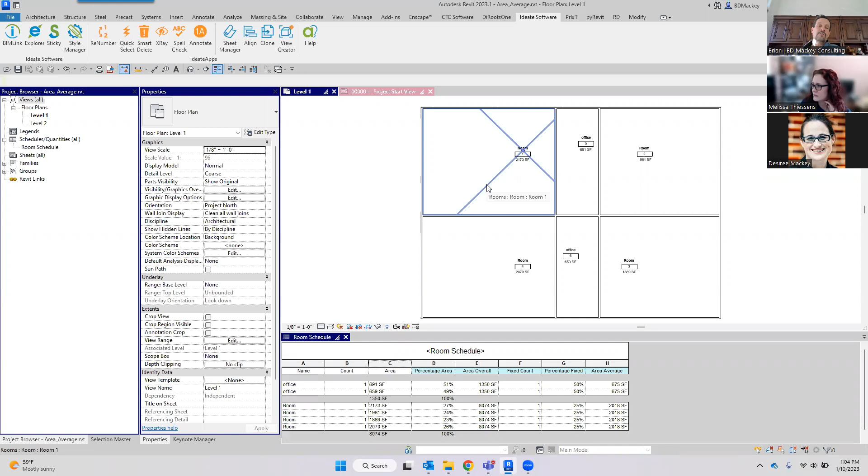And this comes back to that post from over a decade ago: you can't use the overall totals in these things. So looking at this, I've got 4 rooms called room, and 2 of them called office, right? So I've broken those down in my schedule. I am sorting and grouping it simply by the name, and then I've got some totals to calculate the totals of each of those.

When we're doing our occupant load calculations or plumbing calculations or anything in Revit where we want to use the overall math to figure out a calculation, we can't do that in Revit natively. So to get this to work, we need to figure out what percentage of the overall grouping this one square footage is. Once we know that percentage, we can then multiply times that percentage to get the overall square footage.

And it does look a little bit weird when you start looking at it: oh, gee, I see 1350. That's the sum down here, right? You see that on every single one of these. But if I go to sorting and grouping and uncheck itemize every instance, now you're going to see, oh, here's the whole overall 1350.

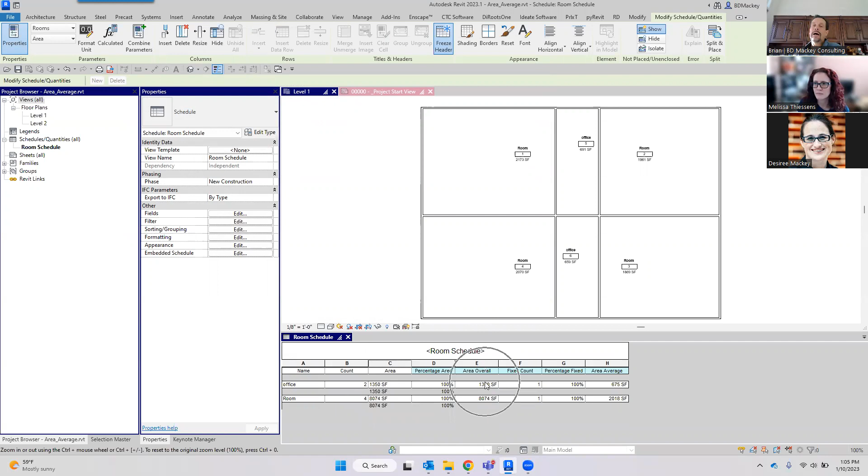Now I see that 1350 here. So in the overall area, I'm summing the totals. This one, I am not. So the question might be, how does that happen? Well, the biggest thing you need to do in Revit is create some calculated values.

So all of these last 5 columns you see here that I highlighted in blue, these are all calculated values in the schedule, right? So the schedule is only pulling out the fields, name, and area. I pulled out count as an example, how we can't use it for the next step, but the only thing I'm truly using is name and area, right? So we then have to come in here and figure out what percentage of this when we go in there.

So when you go create a shared or a calculated value, give it a name, and then if you've ever noticed, you can choose between formula or percentage. Now, once you choose percentage, the first thing is going to be any of the other calculated values you have or parameters that you have inside of here. So the first 'of' is going to be, hey, choose from one of those parameters. And in this case, I want to know the area.

The 'by' is then going to either give you grand totals, or the option you get here is how you're sorting and grouping it. So this is one I know causes a lot of people confusion. It's like, oh, how do we sort and group, or how do we get a value for 'by' other than grand total? Well, if I jump out of this real quick and go back to sorting and grouping, if I sort and group it by name and then by

area, you'll see that now when I go back to that fields tab and I go into that percentage, I don't just have name and grand totals, I have grand totals, name, and area. And so coming through here and looking at this, like, oh yeah, it's the grand totals, it's the name, it's the area, right? Again, if I cancel out of this, go back to the sorting and grouping and get rid of area and say none, then in our fields tab, for any of the percentage calculated values, we only get what it's sorted and grouped by.

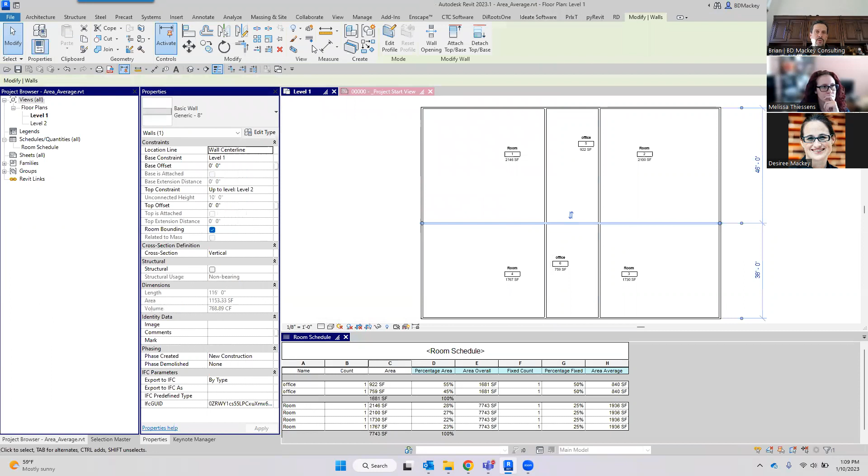And if I were to come in here and draw in another small little wall in here, let me just go say create similar, create similar is right there. I keep missing the button. I'll put this in here. I'll go ahead and copy my room down by control dragging, right? So now I've got a new office in here, and you can see those numbers automatically updated. But again, now it's still giving me that overall total as we start to come through.

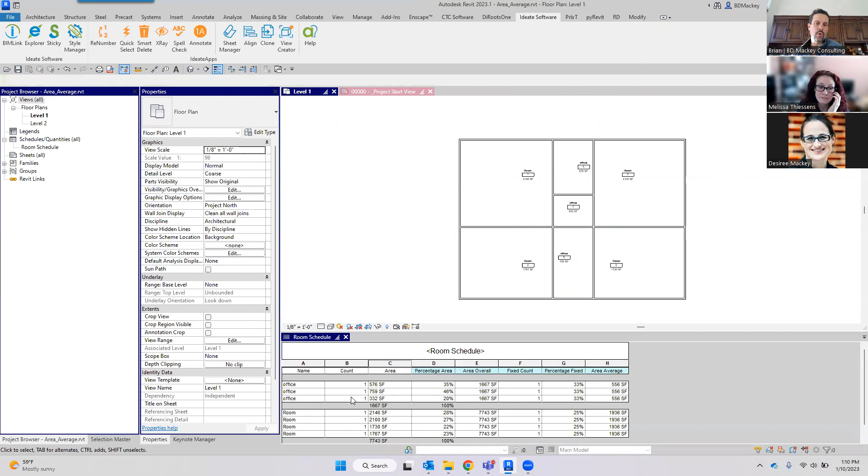So now that we've got that, when we get there and set that up, that gives us that overall area. And that's, again, one of those things if you wanted to, if I go back to my sorting and grouping, click down here, go to my sorting and grouping tab. In sorting and grouping now, if I uncheck itemize every instance and hit OK, you're going to see I'm going to get the same for the overall total for all of the areas as I'm getting here, like you saw.

Or in Revit 23, I can't remember, did they have this in 22.1 where you get the varies in there? I think they might have. If I go back to my formatting and I say I don't want area to calculate totals and I say no calculation, now it's just going to say, hey, this varies, but the overall area is this as well. So however you want to look at it, you can do that.

So then to figure out the average of those, what we needed to do is use the count field. Unfortunately, we cannot in Revit use count as a calculated value, just like we couldn't do with the sum of all of the areas, because each one is an individual element. Count for each individual element is always one. So what I do is I have another calculated value, I called it my fixed count, and the formula is this is always one. There's one room every time I place it. So regardless, I'm going to give myself a single value there.

Right? So the only reason I needed to use the fixed count, or to have a number 1 in every single one of those, is I now need to know, again, what percentage is this. So again, I'm going to go and check itemize every instance. And then I'm going to go back to my fields tab and show you the next one. So the next formula is percentage fixed. And again, I'm saying, hey, take that fixed count, the number 1, and what percentage of that is, by what I'm sorting and grouping it.

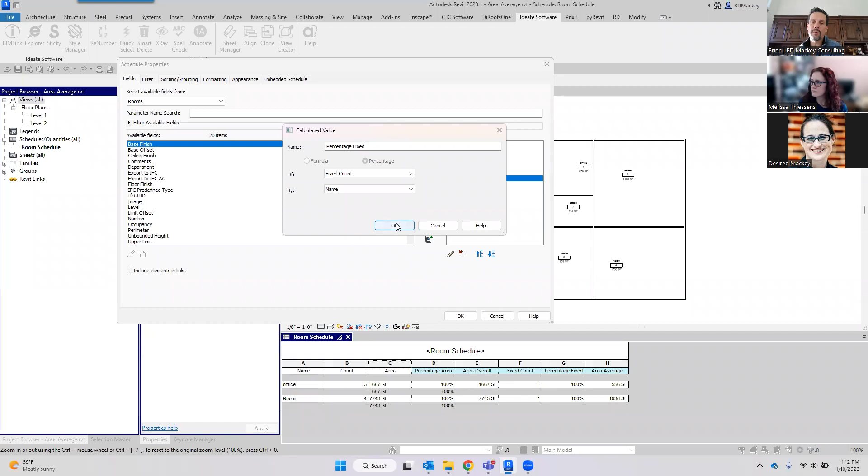So even though this is a number 1, what is that percentage of however many of these are in the sorting and grouping? So if I say okay to this, you'll see in this case I have 3, so it's 33%. In this case I have 4, it's 25%. Again, if I were to break that down and start adding it, those numbers are going to change. The reason why I need this one is for the averages, right? I need to know this percentage is 33% of the 1667. So what that's going to tell me is the average, regardless of what your square footage is on each individual one.

So again, I've got the percentage fixed, which I did the same as the percentage for areas, but it's just 1. And I guess I could have technically done this different. I could have went into that field. I just thought of this off the top of my head. Instead of using fixed count here on percentage fixed, I could have just said no, because I needed it here. Never mind, I lied. Scratch that.

So I've got that. And then I come back here to the area average. Again, same thing. I'm just saying now take the area overall, multiply it times the percentage fixed. So take this overall area, the 1667, multiply it times whatever this is, and then that's going to be the average area.

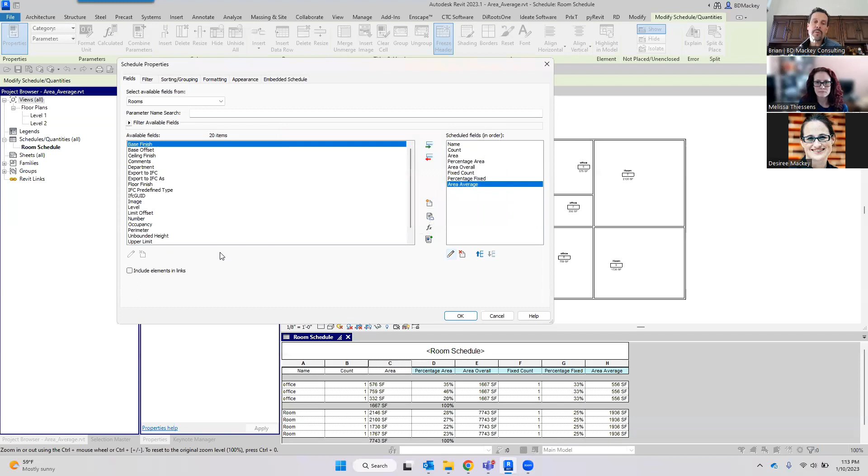So if we really were getting into something where we were trying to come in and say, oh, we've got typical unit 1s, and we want to know the average area of that, not of each individual one, and we were setting this up on a printable schedule, I'd go back to my sorting and grouping. I'd unitemize every instance. I would probably hide every single one of these columns. Boom, boom, boom. Say hide.

And now I'm just looking at, oh, here's my room. Here's my offices. Here's my rooms. And here's their average square footage. So you absolutely can do that. Pre-build it in. I did a little Google searching, and there was a whole bunch of people saying, oh, you've got to use Dynamo to do that. You've got to run the Dynamo script. And I'm kind of like, no, you actually don't. You just need to come in and just use percentages.

So, it helps to be married to somebody who knows math, or to know people who post math formulas in the forums quite often. And I'm still trying to buy time because we only have one question so far.

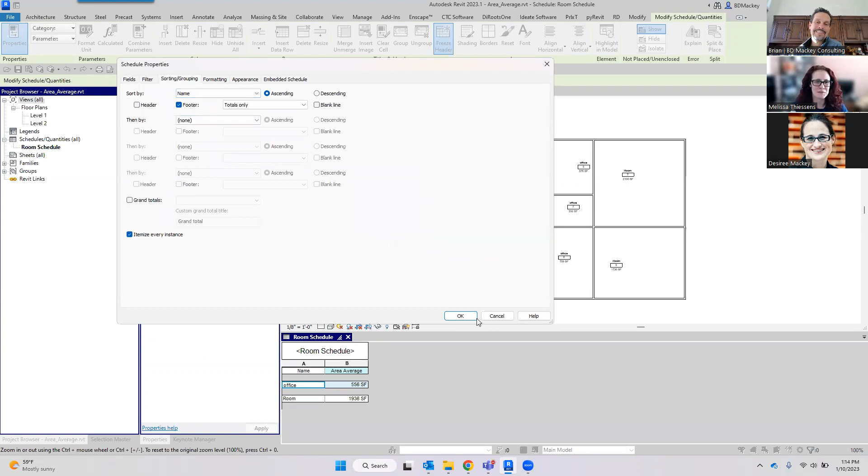So I know, Melissa, how else do you guys kind of use this stuff in your template when you're starting to work on it? Very similarly. But also with Dynamo, because John. You also use Dynamo because you have, well, not all of us have John. Yeah, it also helps to work with a John Pearson when we're talking about that and getting into it.

No, we do very similar in our code stuff, and have that fixed count parameter. Yeah. The fixed count parameter, you don't necessarily need all of the time. Like if I'm just trying to figure out the overall area, that's not one that I needed. It was funny. I did this in one of my fields and I had it in there. I went back, looked at my schedule. I'm going, I'm not actually using that in any of the other formulas. Why did I put it in here?

It was just such a habit on certain things that you do. It's like, yeah, I needed that. So I basically do these 5 fields all of the time. I just put it in there and I'm like, wait a second. I was only using these 2 fields. I didn't need that fixed count. Okay.

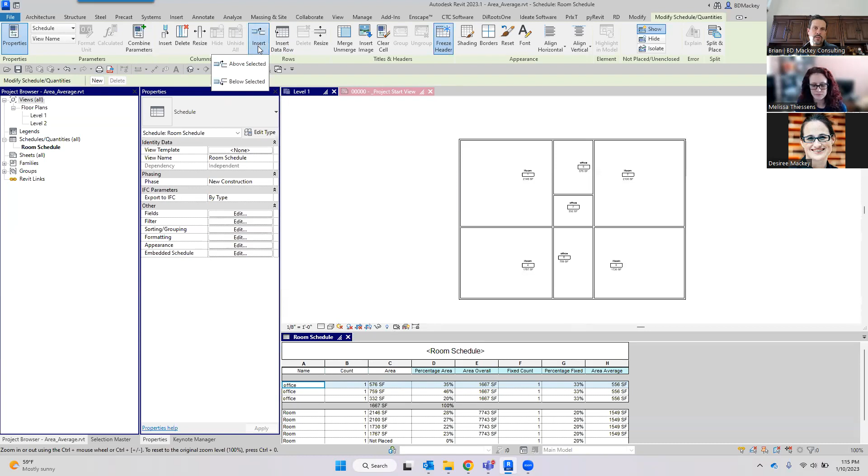But again, also want to reiterate to people that you want to put some sort of note, like if you have this in a working schedule, add a new row up here or something like this. Come on, I want to insert below, put something in here. Do not change grouping, sorting, whatever. Something big so people understand, hey, this truly is what we need to be doing so it doesn't break the schedule.

And since we did mention John Pearson's name, I do want to mention, and Melissa was jealous because John released this like a day or 2 ago, and I've already had 2 updates to it because I noticed a couple bugs. But I always get asked, how do I get my colorized tabs? You might notice that I've got the colorized tabs, but John's latest update colors the properties in the project browser to be the same. So if you switch from project to project, you actually know not only by the tab you're in, but by the property. Sure, it's not working.

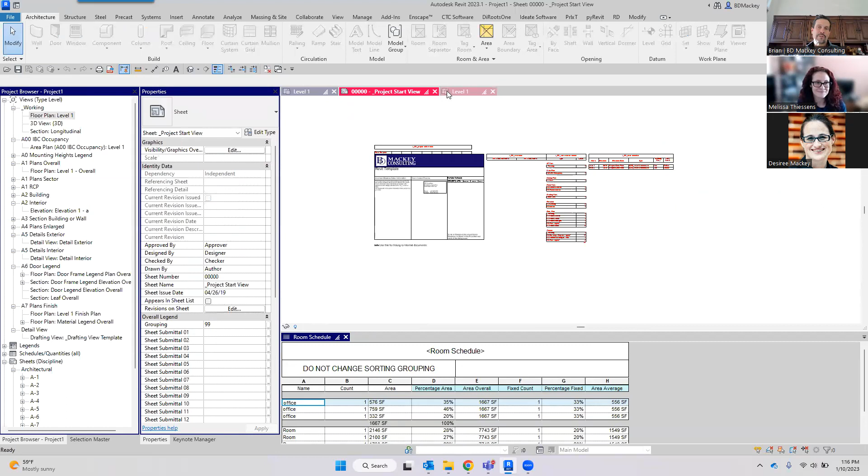Is it because I tiled my views? Uh-oh. Let's see if it's because I'm in a sheet view. Oh, I found another bug for John. Well, this is recording. So what minute are we in the recording? So I can just give that to John. Let me get rid of this and see if it goes back to being pink. Oh, it was literally working right before I started Revit Radio. No, there it goes. So if you're tiled, it's not working.

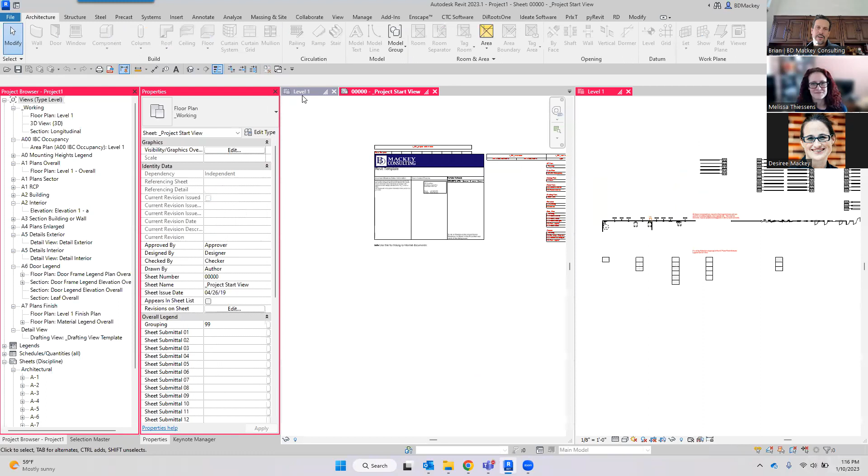It could be Zoom. We found that Zoom has been messing with all sorts of stuff lately. Okay, well, let's tile this up and let's see. Tile it up over here, go back to the blue one. Yeah, not working when it's tiled. So maybe it's a combination of tiled and Zoom. Not sure, but I'll be having a call back to John. Maybe I'll get a third one in 3 days.

So I don't know, just one of those things that's been really nice for me. It does go through and change it. I also have other add-in utilities that give me tabs down here, and you'll see that it's still the same color-coded border. So something to me that was actually really nice looking at this, getting into it. It's like, oh, this is very cool. I can now just have the tabs and I know which properties of which one I'm getting into as I change out my different projects.

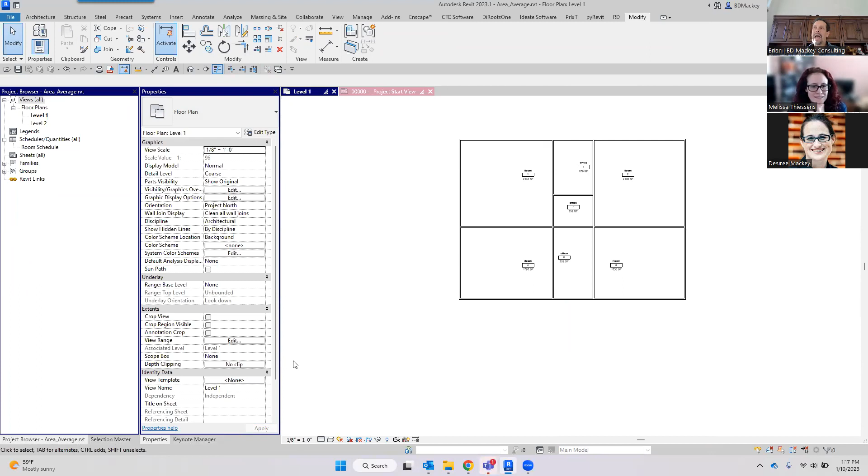Because I have done that before. It's like, oh, I'm in this project. Wait, ooh, now I got 50-50 split here. Sweet. Yeah, I did. It also could be the fact that I have this other add-in utility that's adding tabs down here too.

Okay, so we only have one question here. So we'll ask this question and hopefully that will prompt other people to come in with some additional questions. So what kind of questions have we got, Melissa? Oh look, we have another one. So our first one is, are you able to comment on why multi-category tags aren't available for architectural columns anymore?

Really? I don't know. So your comment starts with, I hadn't noticed. Yeah, my first comment is, huh? Let's see. I purged everything out of that. I'm gonna go ahead and close that. No. I probably did need to save something, but who knows? I was refining it when I was in my last meeting.

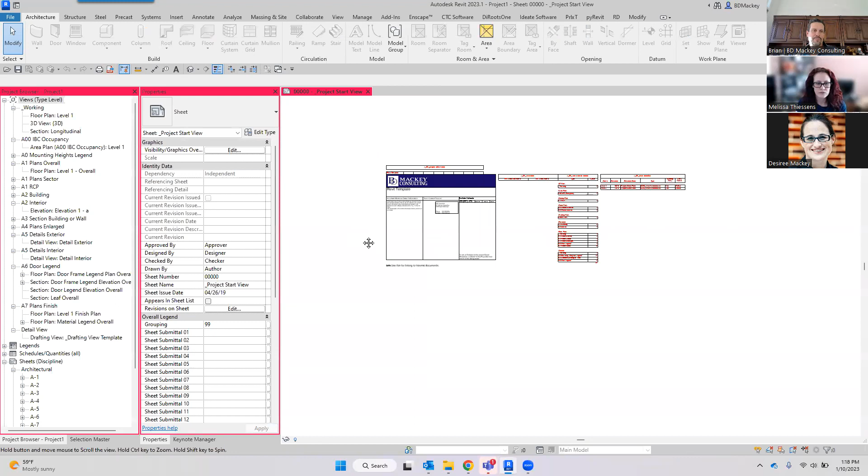Okay, so let's go to floor plan. Let's put an architectural column down. I rarely use architectural columns personally. I don't get why they have a chamfered column here. To me, that should be structural. Are they not allowed in your household? Yeah, if you're doing a metal clad or a Doric column, I kind of understand, but the round column and the chamfer column, I don't use those ever, just because it drives me crazy that that should be a structural column.

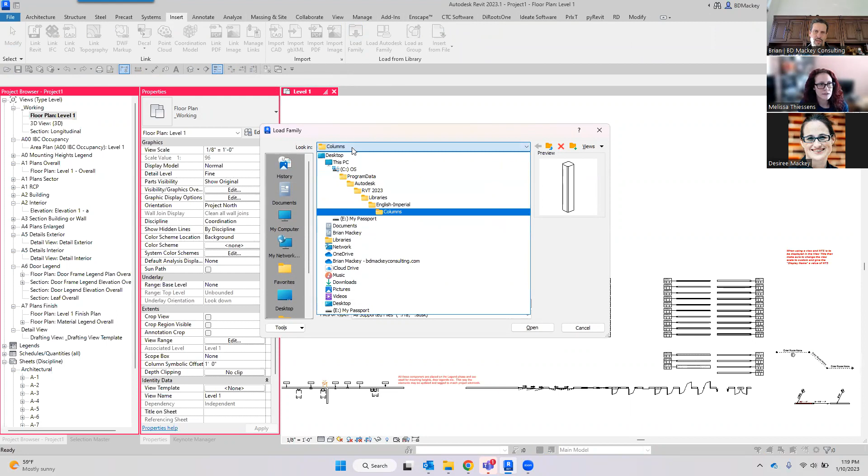What? Oh, let me try that again. Insert, load family. Chamfer column. I am under just columns, right? Yeah. We'll do the Doric column. Okay, now we'll go back to architecture. We'll go to column. I swore I clicked column architecture before. I might not have. Cool.

Oh, did you guys ever notice this bug as well? Just FYI, if anybody ever wanted to know what it was, have you ever tried to place a column and it doesn't show up in your preview? I don't know if everybody has this problem. It's mostly with structural columns. It's because your level is not at 0 in your project environment.

So I know a lot of my clients start their level 1 at 100, and you go to place a structural column and you do not see the preview of it until you place it. It's because your view range is below the level you're on. If show family pre-cut in plan view is turned on in your structural column family, and you're placing it on something other than 0, that will not display the preview of the column. It's a pain in the ass. It is a bug.

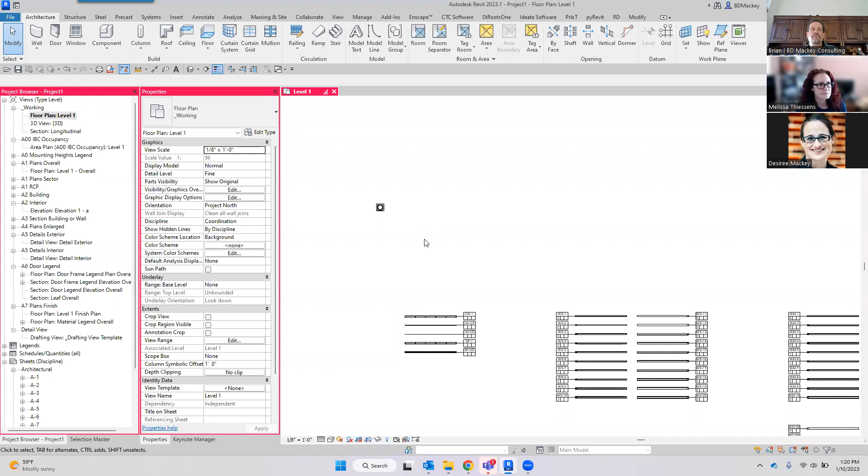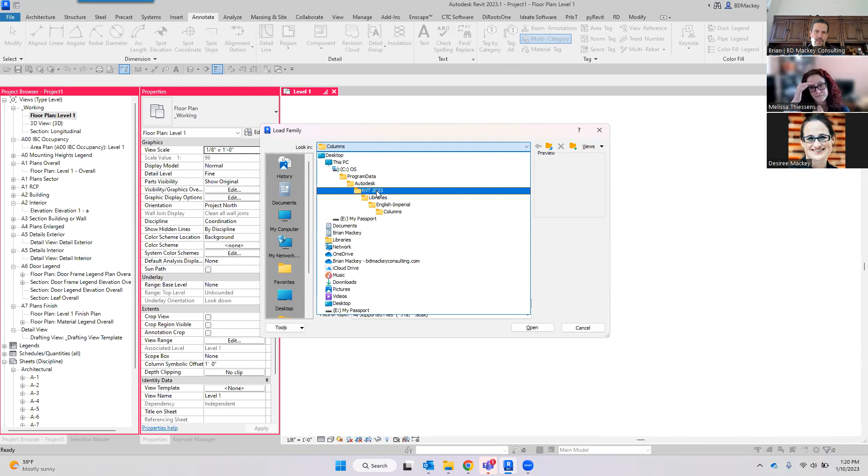Okay, so we got this one here. We're gonna go ahead and try to do a multi-category tag, get back to the original question. Tag, where am I going? Annotate. Multi-category tag. Is there an out of the box multi-category tag? I haven't looked. Okay, so it is working for me.

Uh-oh. So this is a multi-category tag. I got it working for me. I have no idea what this is tagging. I'm assuming probably comments. No, that's a type parameter. So what did I change? So it's the type mark. So what must be the problem, Rowan, is you're selecting something in your multi-category tag that doesn't exist in that family, would be my only guess.

He's blaming it. He was in Revit 22, not Revit 23. Oh yeah, totally blame it on Revit. Totally. It was just a glitch in the matrix. Yeah, I'm not sure, because I thought they were still there.

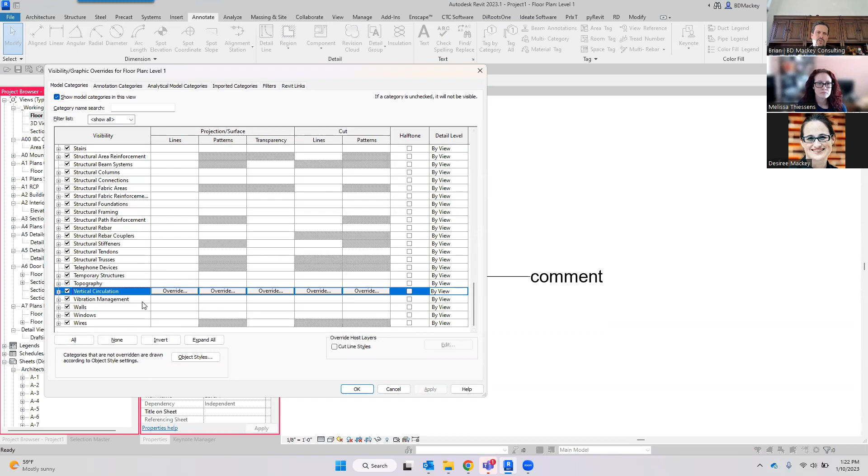They did add more categories to it. And somebody actually did post recently that the multi-category tags do not pick up on a lot of the new categories in Revit 23. So in Revit 23, we got things like vertical circulation or something like that. I did notice in one of the Autodesk forums that somebody was saying some of these new categories don't pick up on multi-category tags.

So not sure, maybe they're doing the same problem, Rowan. I didn't really follow that post any further. Somebody commented, and I was like, huh, interesting. So it's working for me. I think you just need to check your tag and make sure it's pulling out a parameter that exists within that family.

And I also wouldn't say it wasn't a thing that didn't work in 22 that now works again. Yes. It might have worked in 2022, but not 22.1, but 22.1.1, something like that. It happens.

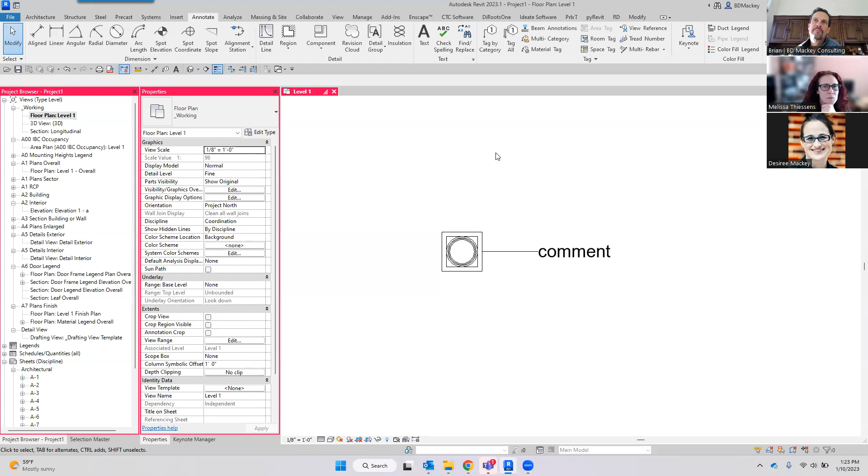Well, maybe you should open up 22 and just see if this thing works in 22. I can do that while we're answering the next question. I'll go ahead and open up Revit 22. So what's our next question while that's taking forever and a day? That's the problem with having too many add-ins. You get too many add-ins, it takes so long for Revit to open. That is true. So what's our next question while we're waiting for that to open?

Rick just posted another one. Does the recipient of a Revit project file need the keynote file for the keynotes to appear correctly? No, until they try to manipulate something in that object. So I know for a lot of my clients, they have the Revit keynote files. I open them up even on BIM 360. The keynote file is not on BIM 360, it's on their server. I will still see all of the keynotes properly until I attempt to go manipulate something. Then it'll just come up and give a question mark. But once they open it again, it obviously repairs that and fixes it. So no, technically you don't need to have that keynote file.

Now, I don't know if that file has been e-transmitted, or what the heck did we call that? I forget what it's called, transmit a model, whatever that is. If they do that, I'm not sure what happens. I don't know if it brings the keynote file along when you do the transmit, but no, I've done it with seeing the stuff.

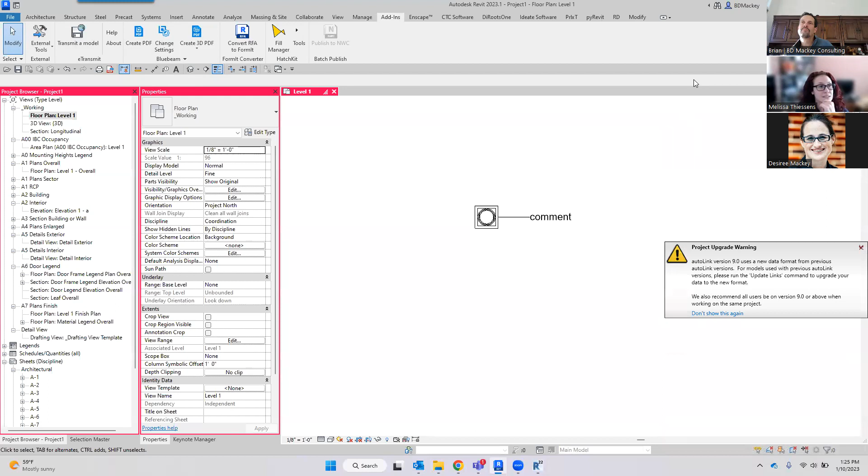It's just fine. I've even opened up my own thing where I've lost the keynote file. I go through and say, oh, okay, look, I forgot where it is. It can't find it. I moved folder structures, whatever. And I still see the keynotes until I go to manipulate it. So you should be okay without having the keynote file for them to appear correctly. But I'm not sure at what point in time Revit's going to regenerate those things and say, hey, no, I'm sorry, I'm just going to give you question marks. There you go.

Cool. So 22, I think, opened. So we'll start a blank new project. Not with the construction template. Oh my God, I must have broken my INI. What? I thought I just deleted the construction template out of there. It's one of the worst templates ever. Because it sets the phases up for superstructure and all of that, breaking a building down.

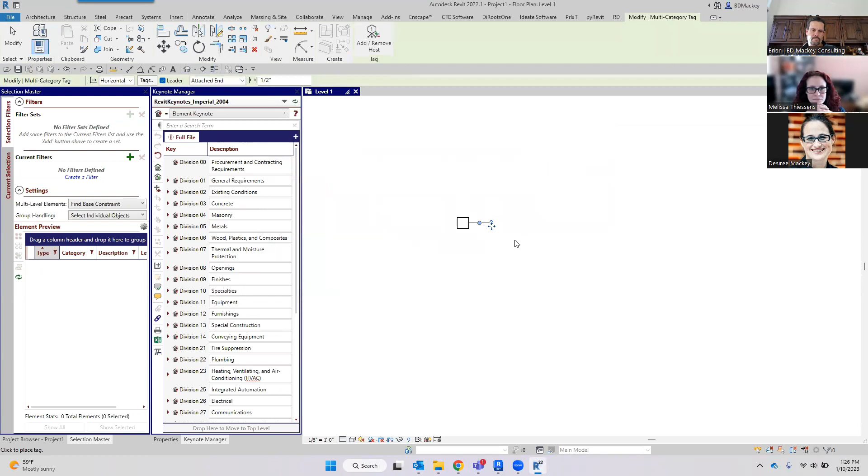Come on. Column, architecture, put one. Tag. Multi-category. Sure. Yep, just do your own. Still working for 2022 as well.

Bummer. Maybe, well, and then you can run it down. It could just be that file that you were working on. It could be the tag. Could be your computer. Could be the day of the week.

It could be you. I know, Rowan, I was trying to be nicer. I'm just saying. He gives me enough crap when he asks questions on Revit Radio. All right, fair.

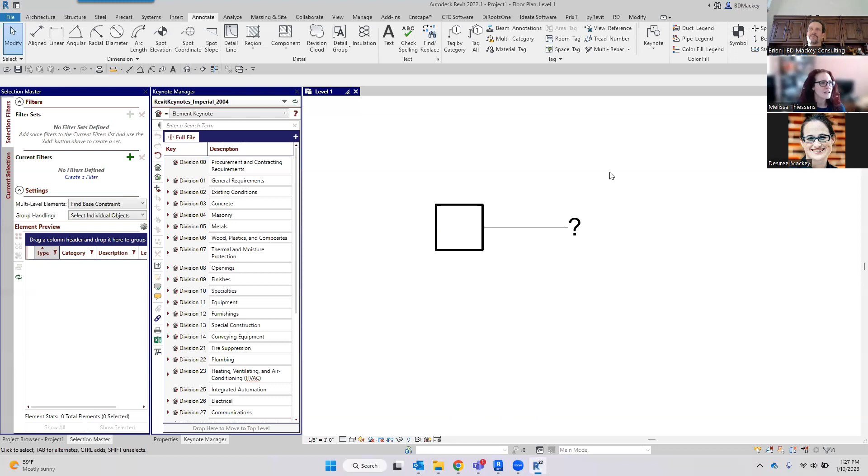Oh, look. Well, it's a good thing that you got 2022 open because we have another question from 22. So Christopher's asking, is there any idea in Revit 22 when you use keynote tags, when you add a host, the leader goes out to the middle of nowhere and you have to drag it back to the component you were trying to add? So it doesn't necessarily have to do with the keynote tag.

So the reason why that's happening is when you are going to tag, right here, you have your tags set to be attached end. And when you set it up to be an attached end, Revit looks for the quadrant of that family, right? So you can see that I've got this tag here. This tag is already there. It's been set to be an attached end, not a free end.

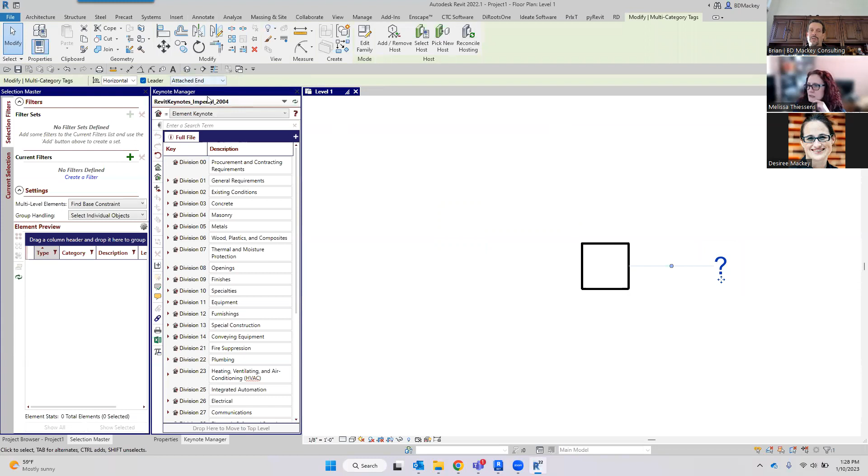And if I come in here and edit this column family, I'm going to go into a floor plan to do this. Use floor plan, ground floor. If there is something in that family, usually a reference plane that is outside of it, or it could be a reference line, whose definition is set to be strong or weak, medium, or named, it will think that's the extent of the family.

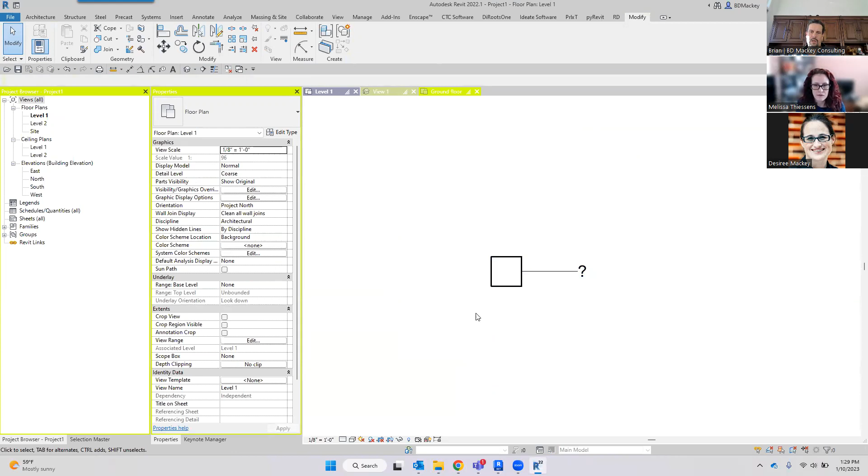So if I came in here and drew a reference plane, I believe a reference plane will break this as well. I take this reference plane here and change its properties to be a strong reference. I'm going to load this back into my project. I'm going to override it. First off, you can see I'm grabbing that stupid column family. Wait, where is it? It's way up here. And I'm going to try to retag this.

It might not be a reference plane that's doing it. It could be a reference line, but let me try to tag again. Let's just do tag. Make sure my tag is attached end. I probably don't have a structural column tag loaded, so we'll go to multi-category tag again. Or you said keynote. I'll do keynote tag. Still set to be attached end, click it here, boom. Okay, so that's not doing it, cool. Let's try it with a reference line.

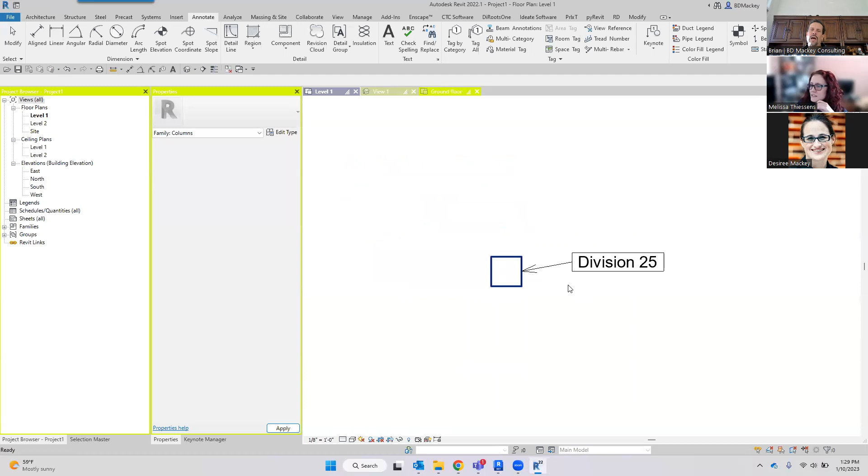Create reference line, change it to be a strong reference as well, and load this back into the project. The reason it's doing it is there is something in that family that is saying, hey, I mean, you can see that the tag actually moved, but I don't know why it's not giving me. No, I did not double click you. I just selected you. I don't honestly get why it's doing that. Possibly because something's extruded. It used to do it with reference planes.

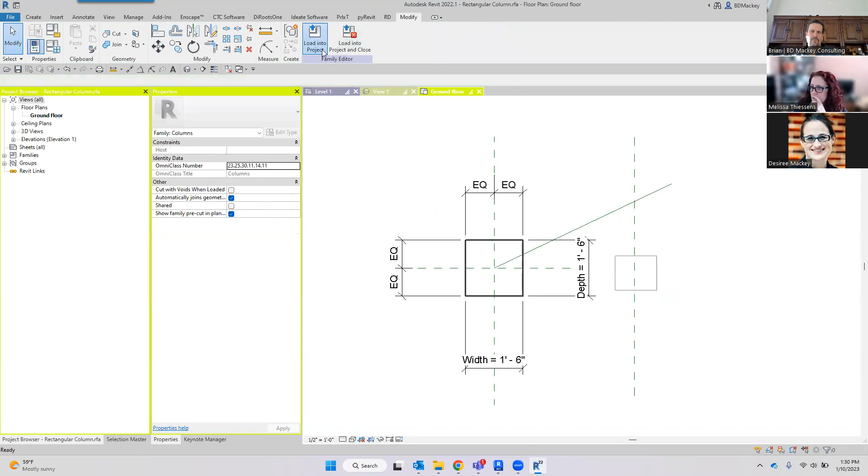What if I go create an extrusion over here, finish it, but then say that's not visible for whatever crazy reason, and load that into the project. Nope. Still not doing it. I'm really confused. That usually breaks it. Maybe it's because I'm doing it with a column family and not something else. Let's try the cheesy desk. See if I can break it with a cheesy desk.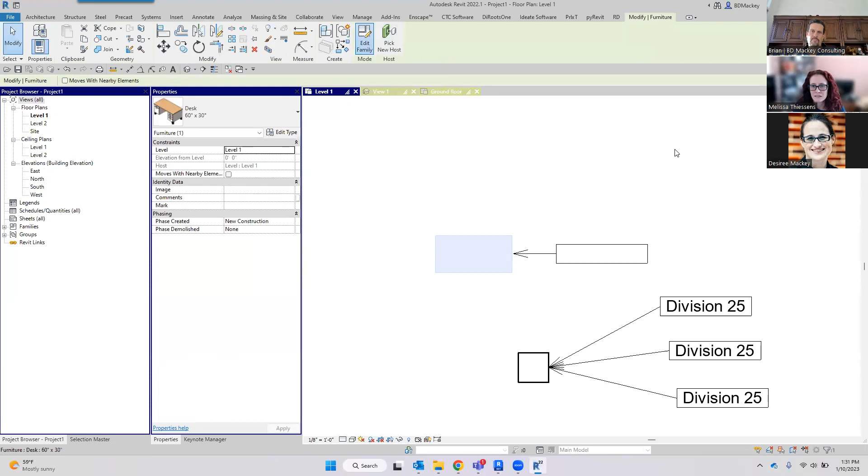And while you're doing that, some in the chat are talking about showing it to somebody else. I can confirm that that works, even for me. By the time you get annoyed enough to say, hey, watch this, it keeps doing that, it stops. Whatever it can do to make you feel like an idiot, I think that's what it does.

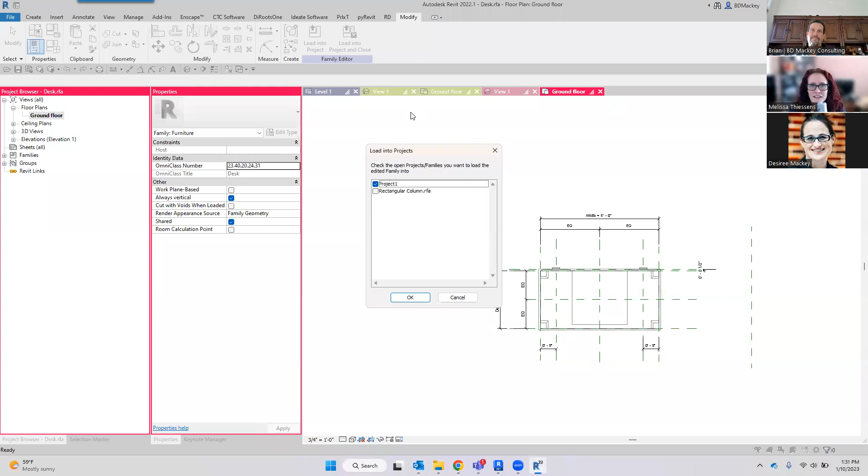Yep, load into project one. The tag's moving, the extent of the tag moved, but the leader isn't. That's weird. It's usually something inside the family that's outside of there. Oh, you're talking if you hit add, but you can only add leader in 22 to text. You can't add leader to keynotes. Sorry, Rick said it's secondary leaders to tag a second element. You've seen the same issue.

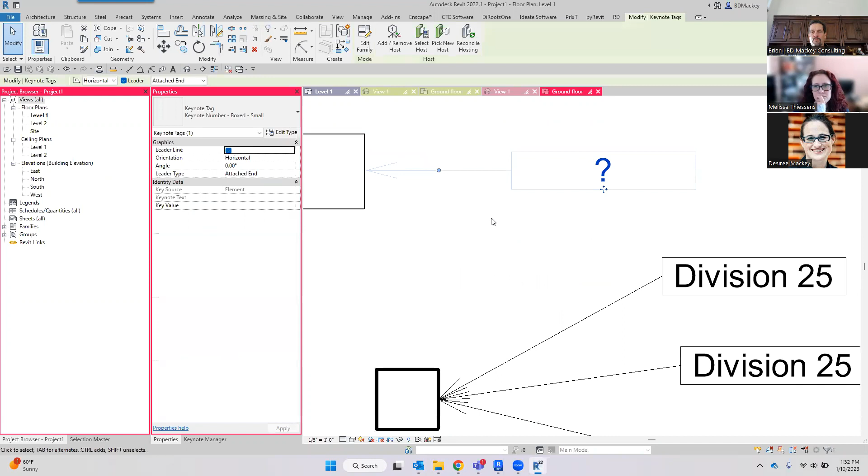I've seen the issue too. Usually it's when I open up the family, there's something rogue off on the side of the family that's causing that to happen. Of course, I'm trying to break it now and I can't get it to break, even though you've been having it break for you for years. It's usually something like that. I don't know why I can't get this to break. That usually breaks it.

Because Free End lets you move it anywhere you want. Oh, that's a new tag. So if I go to Free End, I can move it. Maybe it's just when you're tagging it with the Free End. Maybe that's what I'm missing. Create similar, Free End, tag this, not usually. Yeah, I don't know. I got nothing.

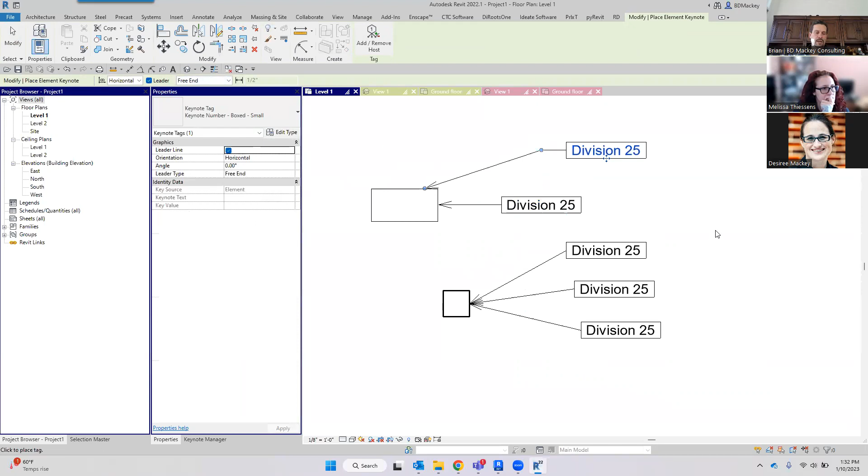No, add remove host. That was in 22. Gotcha. Is that a 22 feature? I totally thought that was 23. Add remove host, do this one. Yeah, I can't get it to break. Should really break for me. Add remove host, this one. Cool. Well, I would think it'd be breaking. It's not. But yes, I understand what you guys are talking about.

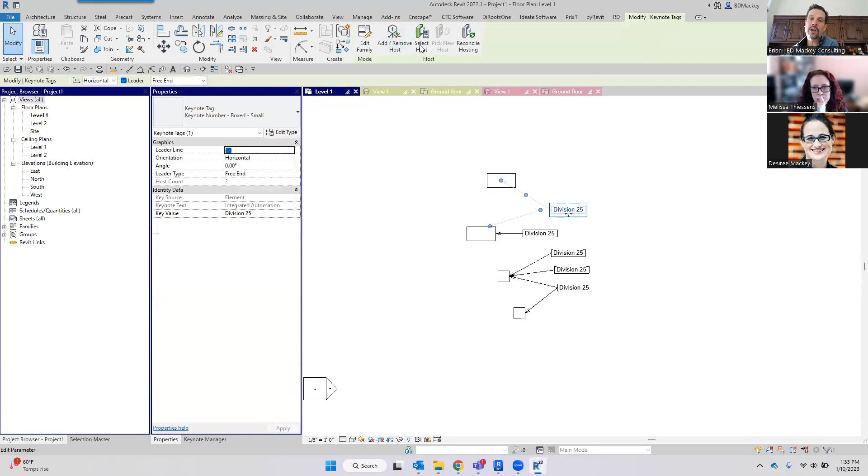I've seen that. Like I said, I would verify in those families that there's not something floating out there. There's not a reference plane or reference line that has a strong, weak, not a reference. I have not seen that in doing multi-tags where you can add remove host. I've not seen that happen personally. I'm not saying it's not, I just haven't had to go try to troubleshoot that one yet. Trying to change these around back, got nothing. Can't get it to break.

I hate it when that happens. Yeah, see, it's only adding more credence to having somebody else watching. Yeah, I always love it. I get clients. I've been struggling with this for an hour, and they call me up and they go through it and it works fine for them. They're like, great, thanks for the help, appreciate it, bye. I'm like, cool, glad I could be of assistance doing absolutely nothing. Yeah, it's totally a thing.

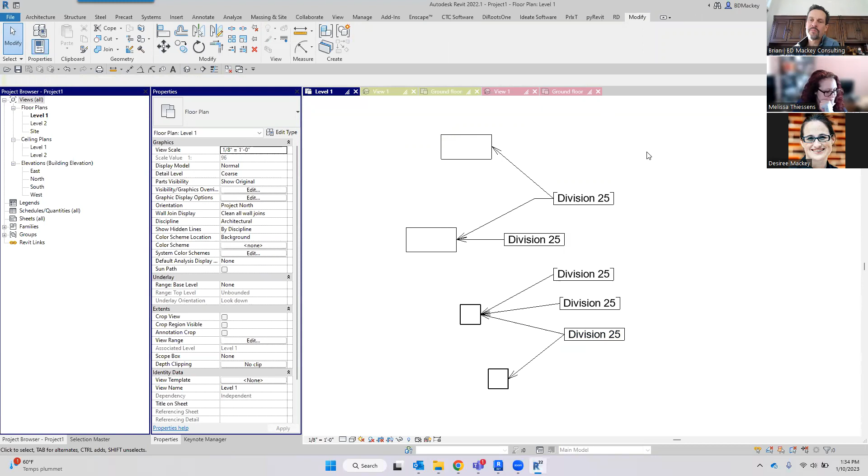So what other kind of questions do we have here? So our last question from Anonymous is how do you export shared parameters that exist in a project if you don't have the original shared parameter file? So it'll be the same if you're in a project or in a family environment. It doesn't really matter. You just need to get to where those parameters are. So in the project environment, you're going to go to Manage and go to Project Parameters if it's something within the project. You'll see these are all of my crazy parameters for code, etc., that I've added inside of here.

Well, if you don't happen to have one, when you select this and you hit the edit parameter button, you will get the button here to export. Mine is not grayed out because my shared parameter file has this one in it already. So if I cancel out of this and I go up to my shared parameters, I'm going to point to a different shared parameter file. Sure, we'll try that one. No, that one probably has it as well, but we'll see. Manage project parameters, come into here, grab this, say edit. Cool. Well, that client has my shared parameter in there as well.

But normally you would just get this export. And once you run that export, if you then go open up the shared parameter file you pointed it to, inside of there you will get one called exported parameters. So these ones are ones I've exported from clients where I was like, hey, I need to just grab your shared parameter real quick to tweak something for you. I open up their family or their project and I can just go grab that and export it. Like I said, it's the same thing if you're in the project or in a family environment too.

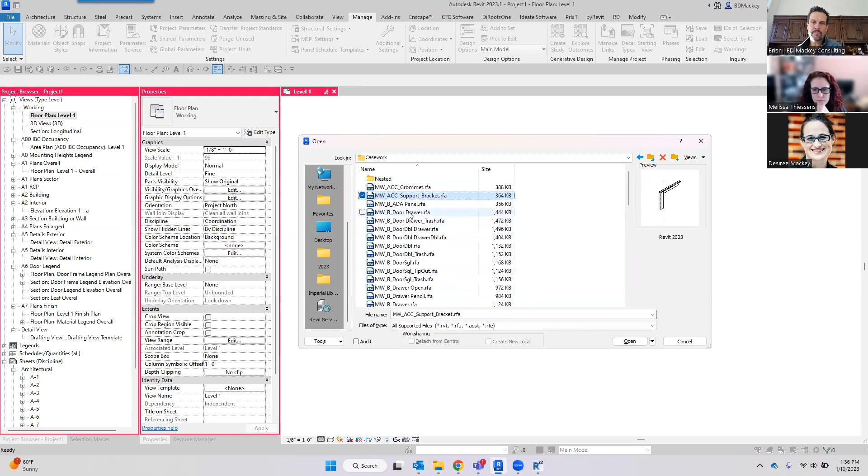So if I open up a family, the only difference is you're not going to go to manage project parameters. Oops, not the button I wanted. You don't get project parameters up here. So what you're going to do is go into your family types and find something that is a shared parameter. You won't actually know if it's a shared parameter or not, but if I hit modify, it'll say shared parameter, and then I would get the capability to export that.

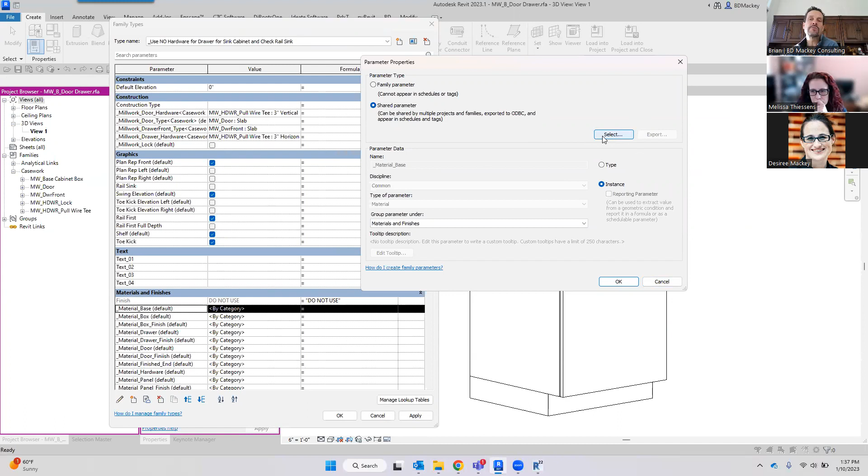In the family environment, you can also select to swap it out for a different type of parameter. So in the family environment, you can swap it out to another one. In the project environment, select is grayed out. That doesn't exist. The other way to do it is, I think, the DiRoots tools. If I go into the DiRoots tools and I go into parameter manager, I think it'll come through here. And this is a free utility.

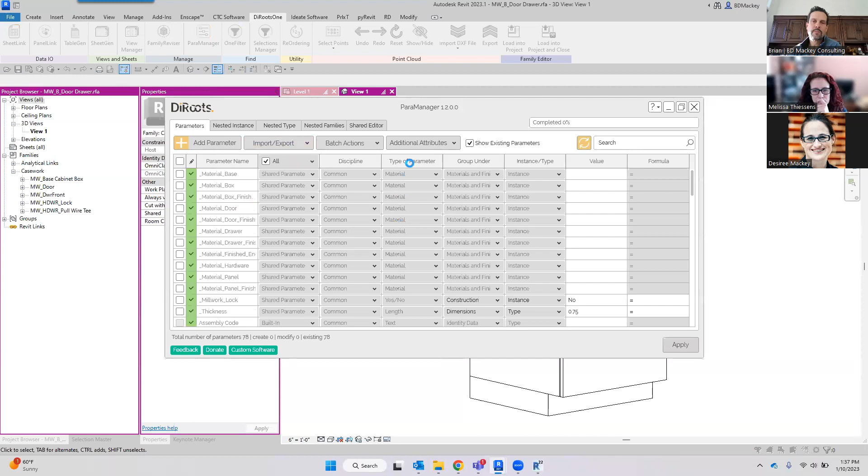It'll start saying, hey, look, these are shared parameters. But then you can go through here and say, I want to export shared parameters. So with the DiRoots tool, if you need to do more than one, rather than going through the whole little dialog box, you'll see that it's going to come through here. All of these are the shared parameters. So it's not pulling out any parameter that is not a shared parameter.

So then you can say, cool, I want to select all of those and say export. It'll then export it out to a TXT file that you could then import into something else. You'll see, okay, here's my TXT, and then I could go import those into another thing. Try to find an add-on utility. I think CTC has one. I don't know if theirs is free or not.

Because the other thing that's a real pain about shared parameters is you can only do one at a time. If you want to bring in 10 shared parameters in your project, bring in one, bring in another, bring in another. It's kind of a pain. But if you've got the whole import export, you can go in here and say, I want to import a shared parameter file. Grab that shared parameter file, which would be here for my shared parameters. Then it'll show all of them, and then you can bring them all in.

It does show you if they're in the project or whatever, and what type of grouping they are. But now I can say, let me go ahead and import those, and now all those shared parameters are going to be inside of here. So I do suggest getting some sort of tool to do that. It makes life much, much easier when you get into it.

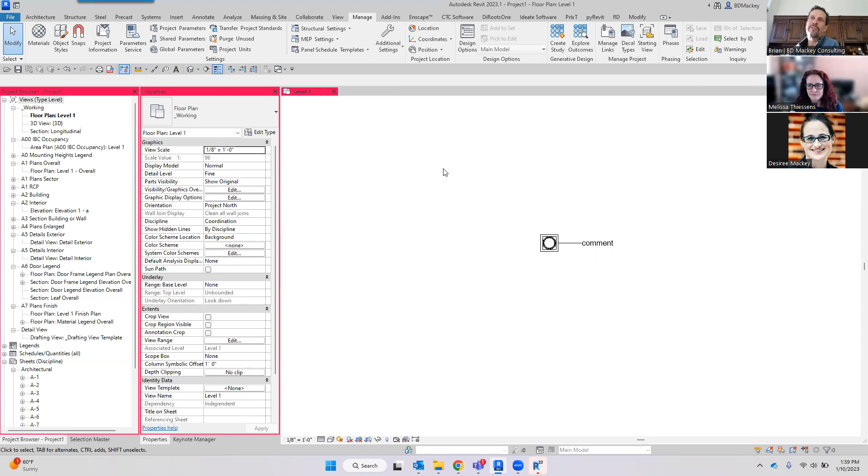Yes, a comment about using schedules. That's what I like to do too. Yeah, and that was going to be my other thing. So for all of my architectural clients, who are usually the lead, they usually have 15, 20, 30 parameters for everybody to organize their sheets so they can actually get them to schedule properly. So the other thing that's really, what was that, Melissa? I said 15 or 20. That's impressive. Just for sheets.

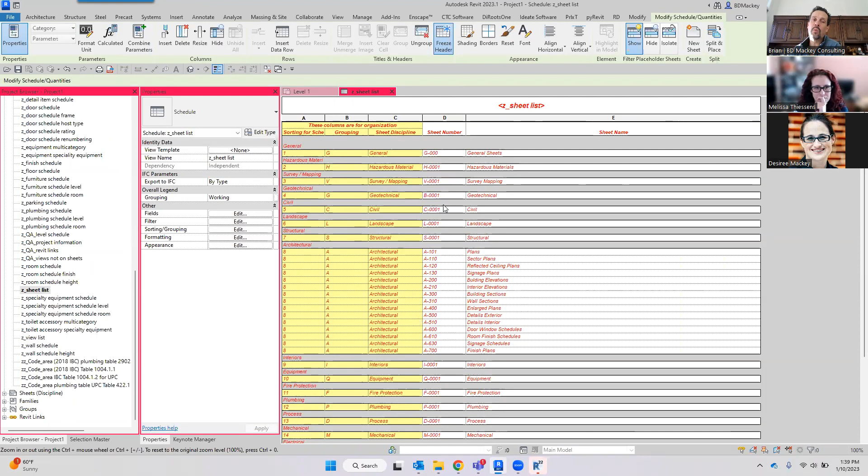Well, actually, I think one client has 45. So one thing on that too is if you get into, not the view list, I wanted the sheet list. I don't even know if I have one on here. Sheet list. So in my sheet list here, I've got all of these parameters for discipline, grouping, sorting, schedule, those types of things. So one of the easiest ways to do it is to literally just come in here and say copy to clipboard. I now have this schedule in here. Again, those were shared parameters.

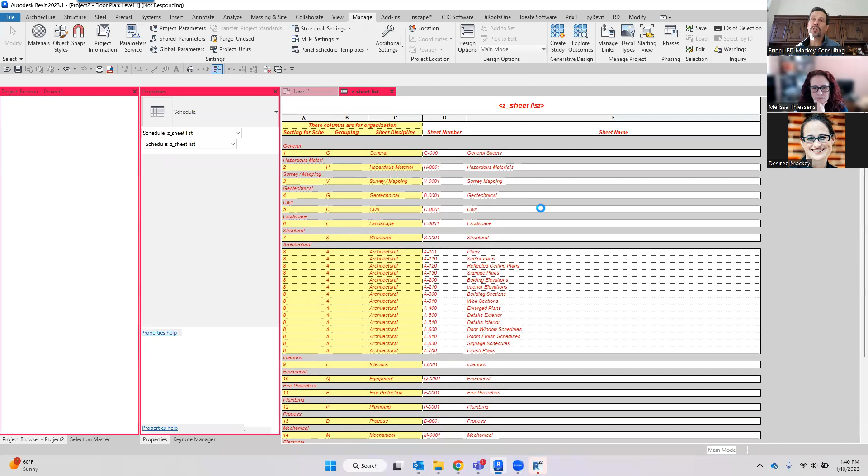If I go start a new project, maybe I shouldn't have closed my other project. But if I start a new project, then I can just paste that schedule. There's no sheets in this new file, so the schedule is going to be blank, but it will bring across those parameters, shared or project, into this file as well. So it doesn't matter if they're shared parameters or project parameters; anything within that schedule that is within the project, it will bring across.

Now, if I were to bring in my schedule for my millwork, it's not going to bring any of those parameters across, because those parameters are all shared parameters from within the family. So you'll see I've got this, and now if I go to manage project parameters, those three parameters came across: sorting, grouping, and discipline.

So, yep, schedules are a great way to do that as well. Again, in the project world, it doesn't care if they're shared. I think these are actually all just project parameters. I don't believe any of these were shared parameters, but it would work the same if they were.

Then just to throw it out there, since we are in Revit 23 and I have 20 minutes to kill and there's only one more question, Autodesk did bring in this new tool, it's on the Manage tab, called Parameters Service. In 2021, I think it came out as an introduction. They have this thing up here called Parameter Service.

When you use the Parameter Service, this is actually a place where you can start sharing parameters on BIM 360. And if somebody's invited to that project, they can then go get those parameters as well. So Autodesk's theory on this is: we've got these 30 parameters that we are using for this project, we can store them in the parameter service on BIM 360, and it'll be able to start picking up some of the data that we see inside of there, right?

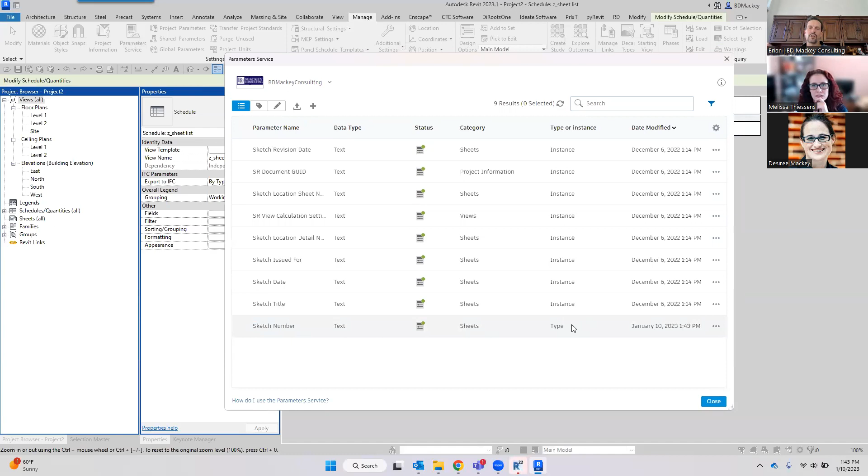Last time I checked, I'm like, hey, I wanted to go grab this one. I can change it, but then it's changing it globally. Next time I need to do it, I've got to change it and bring it in. So I'm constantly changing it back and forth. And it just seems insane to me. And this is just editing it. So I've edited it here.

This doesn't actually bring it in to your, no, actually you can. Yeah, it's already, and you say, okay, well, these are the ones in this particular project. So that doesn't help me out at all. Yeah, so you can change it here. But again, I don't know. I've got to look at this. I'm actually going to be talking to some of the developers on this in the next week or so.

And a follow-up: does it definitely stay type or instance? It used to be. Jason just showed me I could change it. Before, once you created it, you couldn't even edit it. It was crazy. The one nice thing about the parameter service is, I shouldn't close the dialogue, one of the options when you're in there is you can import your own shared parameter file and it'll theoretically bring them all across.

But if you do that, it automatically brings in all of those shared parameters as instance-based parameters, not type-based. So if there were some you wanted to be always type-based, you would have to go through and manually manipulate that. So yeah, instance. Now this one got moved to the type because it's type.

Yeah, it's installed. You do not have to be part of the beta. They're calling this, what do they call these, Melissa? They call them pre-release somethings. So it's in the program for anybody to be able to go use and play with, and they are looking for people to give them input on this stuff.

I know they sent an email like 2 weeks ago. Hey, have you played with this? Do you actually want to check preview technology? Thank you, Jason. Like, do you want to play with this? Do you want to come in and check it out? They've actually been doing surveys and stuff for people too.

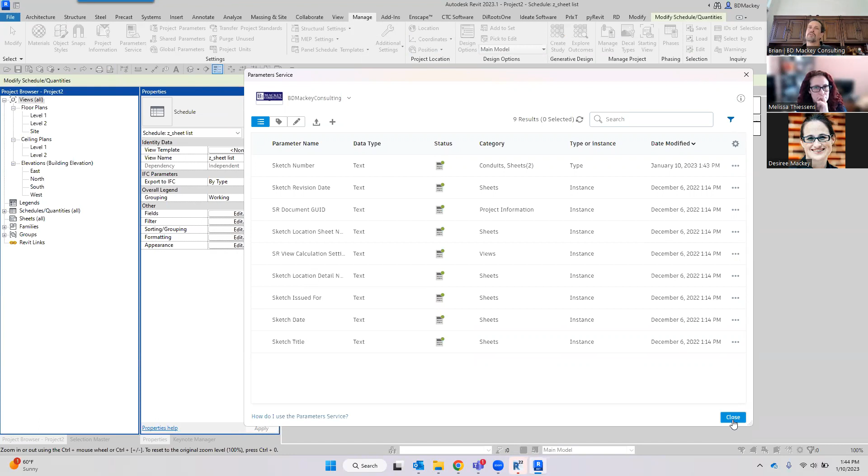So yeah, this parameter service is technically for everybody. It is natively installed. It's just like there's some MEP tools that you can get installed as well, which are not beta programs. They are preview technologies; they want more people to give input on it. Yeah, wasn't the Load Autodesk Family a preview technology at first too? Yeah, I believe that one was too. The Load Autodesk Family was as well.

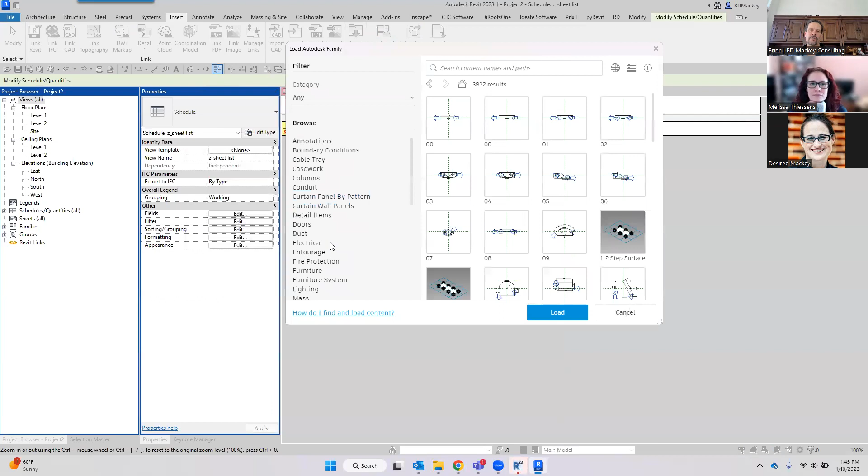I have to say I hated that until I was teaching classes at the community college. And then it was like, oh, okay, now I can go get some of their out of the box crap. Yeah, to me, I didn't like the UI on this. You still kind of have all the same theoretical folder structure, etc. over here, but I don't know.

The one time I was using this it got into a slow thing. I do like all the pretty little previews they give you of all the stuff, but it was taking a little bit longer and the search wasn't working the way I wanted. It's a little bit better since the first release. You can also toggle lots of views and names.

Cool. So we got a couple more questions. What other questions we got here? So here's another one with tags with multiple labels. Yasser says, I had an issue with tags with multiple labels with breaks, that the top left or right alignment didn't work properly for them. Have you ever had such a problem?

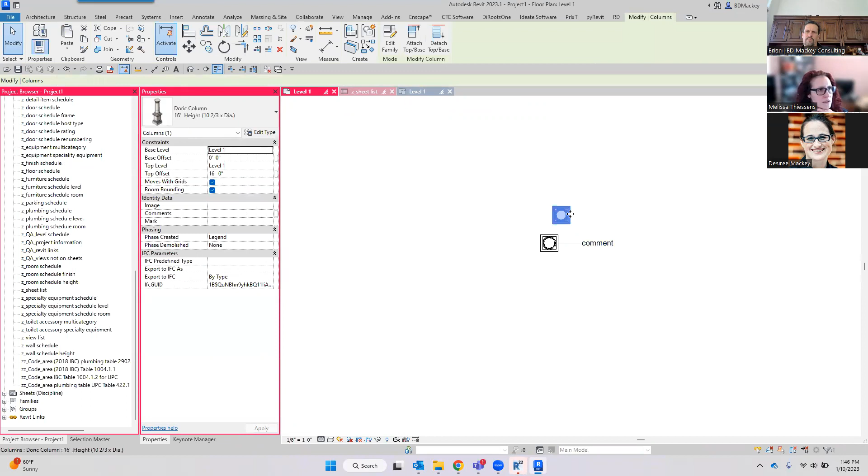Not sure if I totally understand the question. So if I grab this and I say add or remove hosts and I go boom, boom, boom. So you say you need to put breaks, multiple labels in there. So go edit your family and add another label. Got it. Yes, sorry, my brain was on that feature still. Thank you for reading that properly, Melissa, and not just assuming what it said.

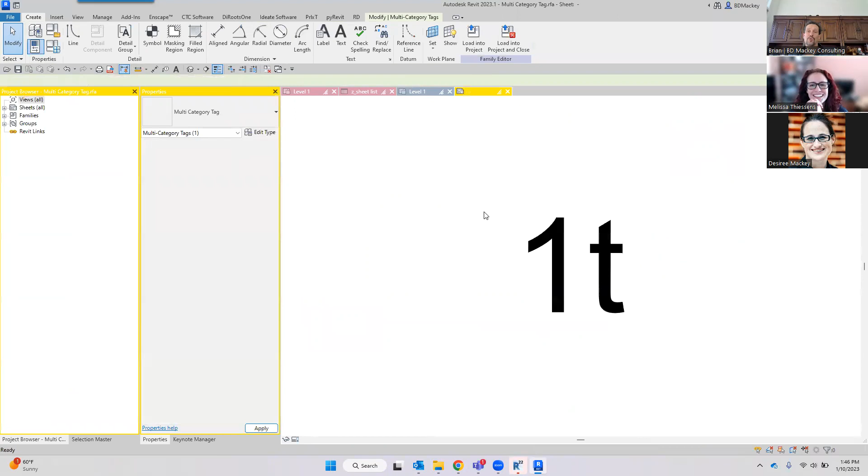So you're talking about when you edit the label and you're like, cool, I've got type mark, but I'd also like to have comments in here and I want to use the break. Yes, that's what I'm assuming is right, so let us know if we both read it wrong. And then you wanted it to go to the left and to the top, and the breaks broke on you. One thing that might be breaking on you is if the width of your label box is too narrow. Could be a problem.

I think that was project one. We'll hope that was project one. Yay. And then we need to add comments to these. Does anybody else hate the fact they added IFC in 2023?

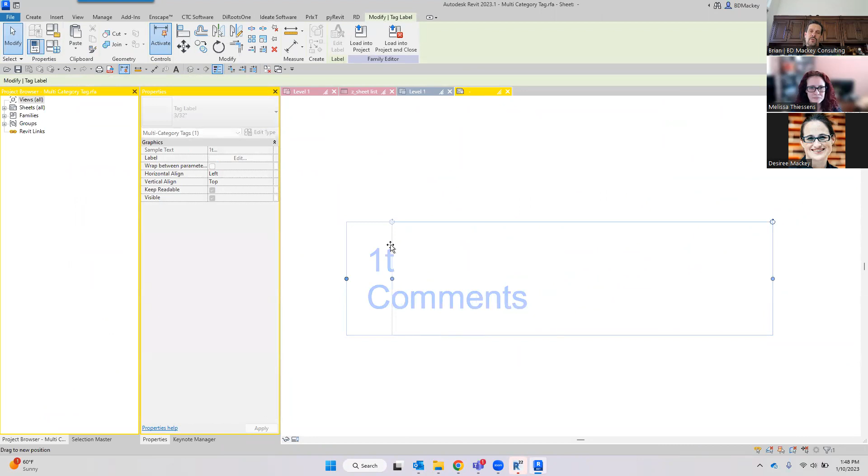So I haven't had issues with these being top and left justified, unless, like I said, if you come back here and this is too narrow. I have seen issues with this being too narrow, and then it looks like it's not actually breaking. It's adding the comments or whatever to the second line. All right. And then let's grab the comments of all these and make it something longer. Get my fingers on the right keys. Oh, I thought I had all four of them selected.

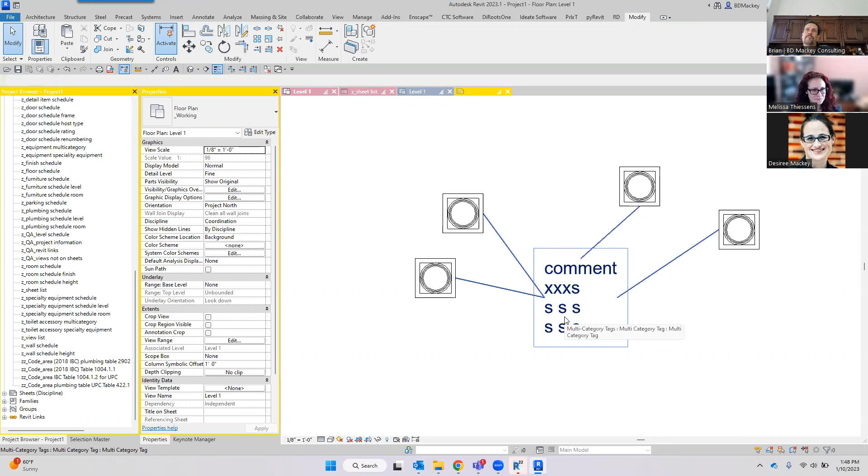So I have seen it do this where it looks like it's breaking and it shouldn't be. That's all I can come up with. Yes, sir. So hopefully that fixes it. Try playing with the width of your tag. All I got.

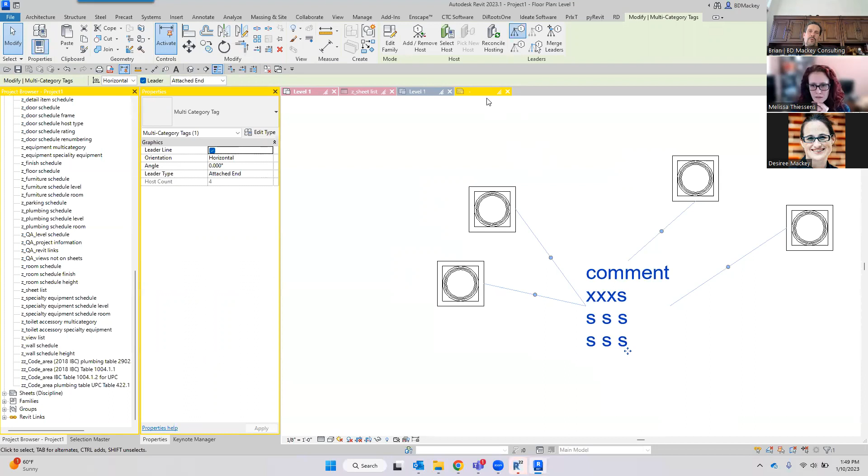We tend to use the stupid invisible line in tags just to keep it right where we want it. Yeah, my only problem with the invisible line trick is, oh, I always wanted this in the center or whatever else. So you do go draw that invisible line.

That then when somebody's like, oh, here's the invisible line, and I need it to be centered, so I got to do this, right? Then when it goes to the bottom, the bottom's down here. So there is a way around that if you do type, just FYI, because this invisible line doesn't get seen. But if you turn the visibility of it off, you can put a parameter on here. So if it's bottom justified, you can have a tag with a bottom justified. So we'll just call it my, I've got to create a parameter, not start typing, my justy.

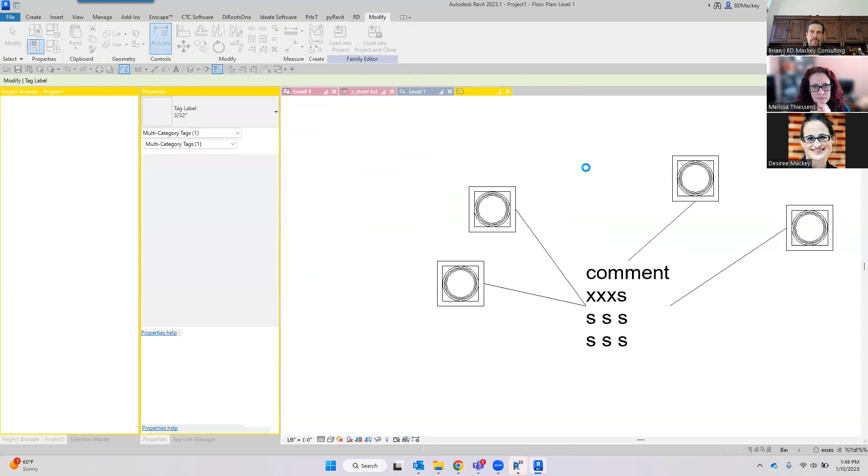And we load this back into the project. Overwrite the existing. Get rid of these stupid comments. Cancel, I don't need to save the project. I hit the wrong button. Let me get rid of my comments and make it something a little bit more reasonable.

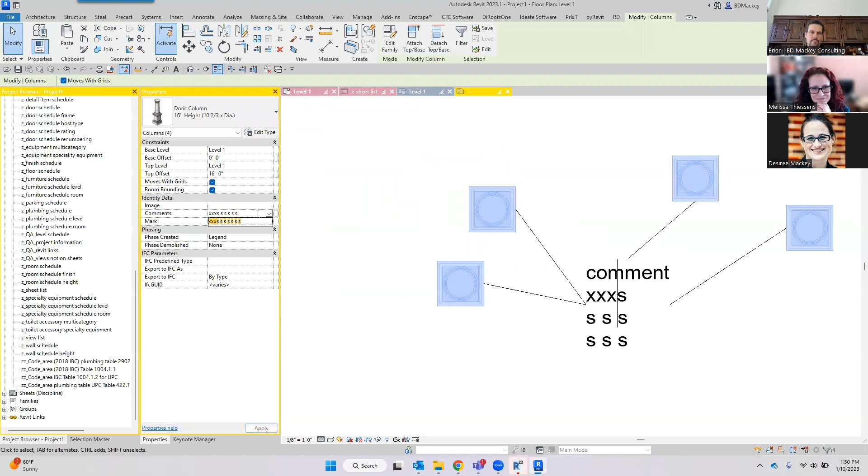Right, so this tag is going to sit there, and you can see it's right below the X's here, but if I go in and say edit type and I make that not visible, oh, I thought that would do it. I'll have to remember what I've done to that. I'll have to open up some old tags, but yeah, there's a way to get it to adjust.

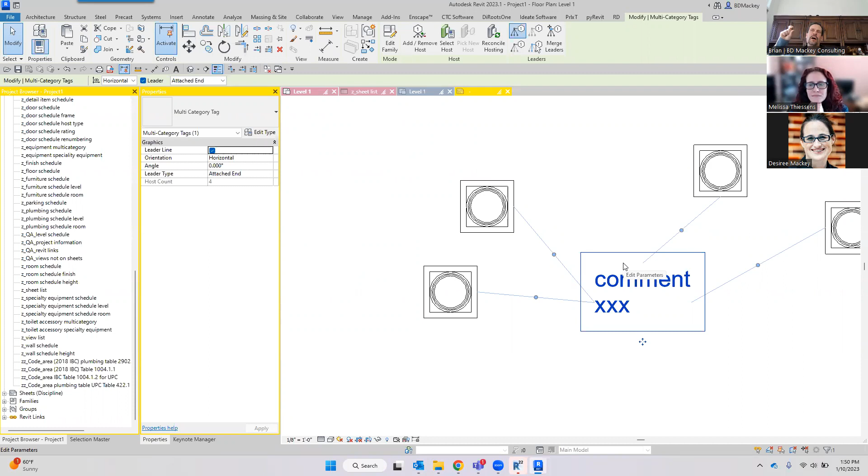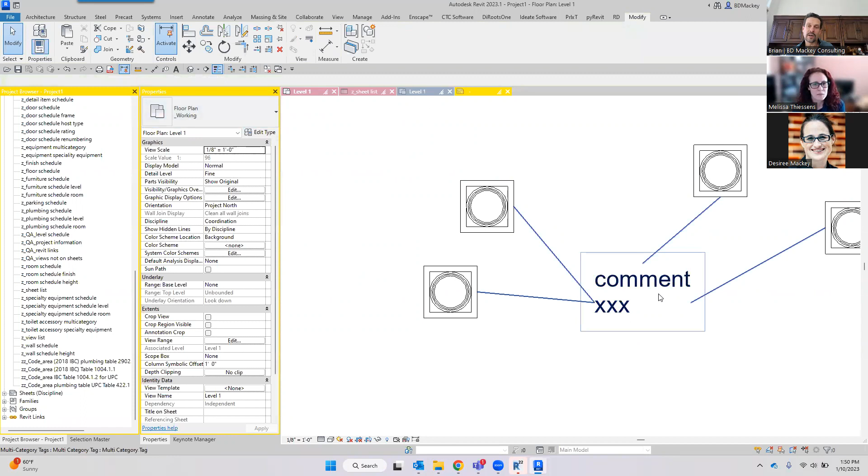Oh, I add a parameter to the length of it. So you can add a parameter to the length of the invisible line. So if it's bottom justified, then its length becomes like 0 height, or barely any small height. If it's bigger, then, so I actually parameterize the length of the line for if it's top or bottom justified. And then I have duplicate tag types. Like here's one here: left leaders, right leaders, bottom leaders. It's stupid.

Beth is saying you could check the wrap only between parameters in there. Yes, there is that too. So if we select this, thank you for the comment, Beth. We grab this. There is the wrap between parameters only button here too. Check that as well when you start looking at it.

So many fun things we have to do. If they would just literally give us a point to tell it where to connect our leader. Yes, leader points, left, top, bottom. We have flip controls, and we've got 4 flip controls. I would love to have 4 leader points. A top leader point, a bottom, a right, and a left, for sure.

Okay, so Augustina's asking, is there any way to order parameters on the properties panel? For example, instance sheet parameters. Yes. When I go to project parameters, unlike anything else, there's not a move up, move down. The way to get them in the right order is to put them in Revit in the right order. So if you want one first, you've got to load that project parameter first. If you want the next one second under analysis results, you have to load that one second. They have a display order like most things in Revit, all based on the way they are loaded.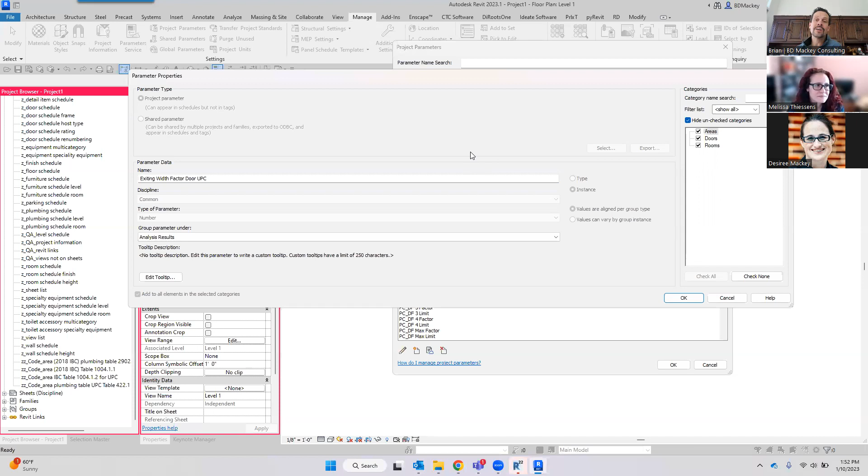So if you're like, cool, I'm going to add parameter 1 through 10, and, crap, I needed to insert one between 5 and 6. You have to go back, delete 6, 7, 8, 9, 10, re-add the new one you wanted between there, and then add those back in, which isn't actually functional or realistic, because most of the time those are already in schedules, and if you remove them, you lose them. So yes, you can, but in reality, no, you're just hosed.

I had one client pay me to do that, like, oh, I needed those in order. Could you please redo those? It's just driving me crazy. They're not in order. I'm like, cool, sure. So I moved everything, redid it. I mean, I know my OCD and my type A personality gets me sometimes, but something like that, it's like, no, I'll just learn to deal. I'll take medicine for that. They've got drugs. And by medicine, I mean I'll drink tequila.

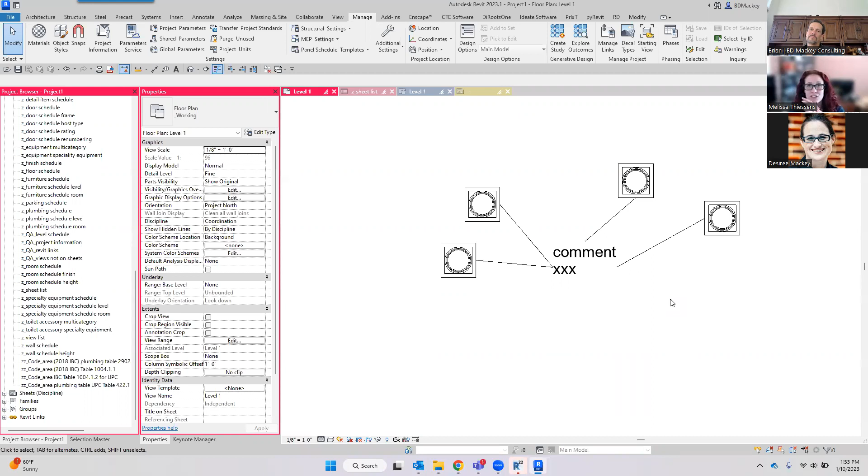All right, Rowan's asking if you could do a quick demo of the Ideate Tools annotation tool. Yeah, this is actually a fun little tool. On the Ideate software, one of the new features was this annotate tool. I am just going to run a dimension from this one to this one and deliberately put it over this. The Ideate annotate tool, and I don't know everything about it, there's a lot more it'll do than what I know about, but the best way I like to describe it is it's clash detection for annotation.

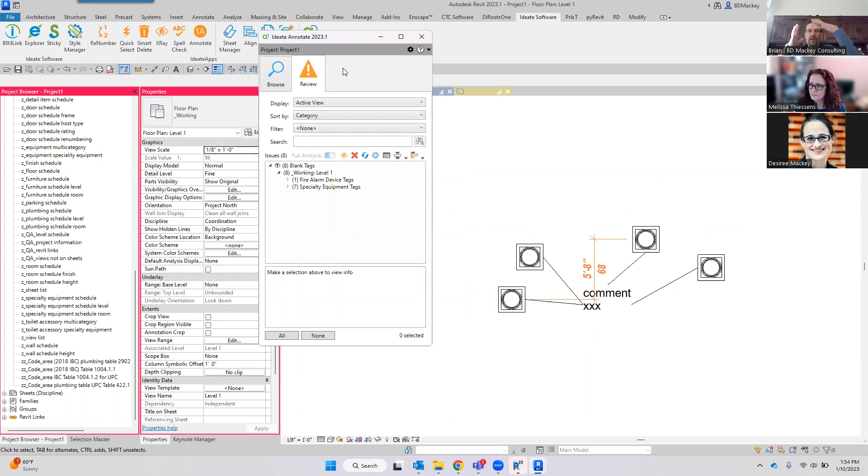Couple things that always crack me up, and they're still working on some things. So like, I know we got a couple structural people here. It does not work well with beam system tags. It does not work well with span direction symbols, because those theoretically expand the entire size of the object. But it will start coming through here, and I love this. I don't have any of those things. I don't have specialty equipment tags loaded in here.

But a lot of times what it'll start doing, and it's not working right now. Let me try it again with a piece of text. Again, it's gonna be one of those things that I can't get it to break right. Text. Try it again, Ideate, but you can start running this, and it does a pretty good job. It's not foolproof. It doesn't get everything at this point in time. But it'll start telling you, oh, you've got this overlapping that. And of course, it's not working at all for me.

Sweet. Active view, sort by category, filter none, tags, dismissed issues. I don't know why it's not working. It should be working for me. Try this. Let me try the refresh just to see. I don't even get why it's telling me I have 8 blank tags in here. I mean, this is just the tag category is turned off probably, but I don't know why this isn't working.

It should be working. But usually it'll come in here and start to tell you that, hey, by the way, you've got this text or this dimension over these other types of things, etc. And it's actually working pretty well. I really like how it's getting set up, and it's been pretty great. And I've actually run it on a couple of my clients' projects, and it's funny. They're like, holy crap, I thought I had organized and went through all of this. And it's like, here you go.

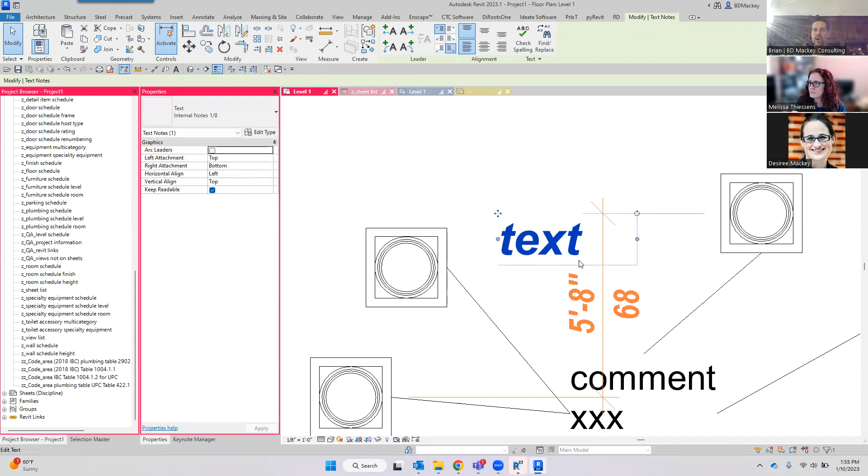Now, with some of it, just like anything else, it's actually looking to the bounding box. So if I had this here and it's technically still visible or still readable, it might say, oh, since the text box goes out to here, this is a clash. But I'd still rather it do that than not come up with it. And I really don't get why this dimension didn't overlap this, but kind of one of those scenarios. But yeah, it's a pretty cool tool.

I do tell everybody, if you have the Ideate tools, look at this. This came out in the release that was around AU last year. So yeah, go through it, try to run it. And it does other things too. I'm just not 100% sure. You can say, hey, I want to distribute things horizontally, vertically. I want to justify all these to the left, right, etc. I think you can even view all of the issues and then export them out as well. So some other tools in here that I haven't totally gotten into.

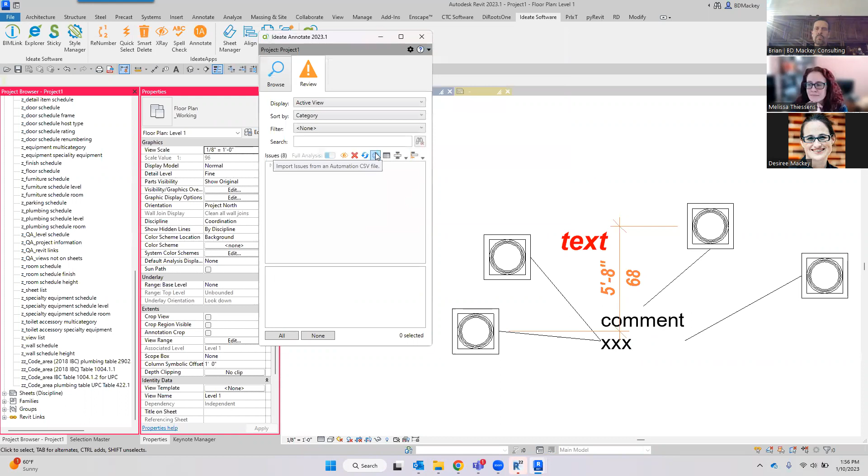Really got into a whole lot of other things, but it's pretty cool. Like I said, I've run it on a few of my clients' projects just to see on real actual views with a whole bunch of documentation, and it's like, yep, these overlap. So I have been using it. It's pretty fun to use.

Well, it's that last time of day. You look like you've got an angel visiting you. Oh, do I have a halo behind me? Yes. Oh, yeah, we can fix that. One last question up here. There you go. No more angel.

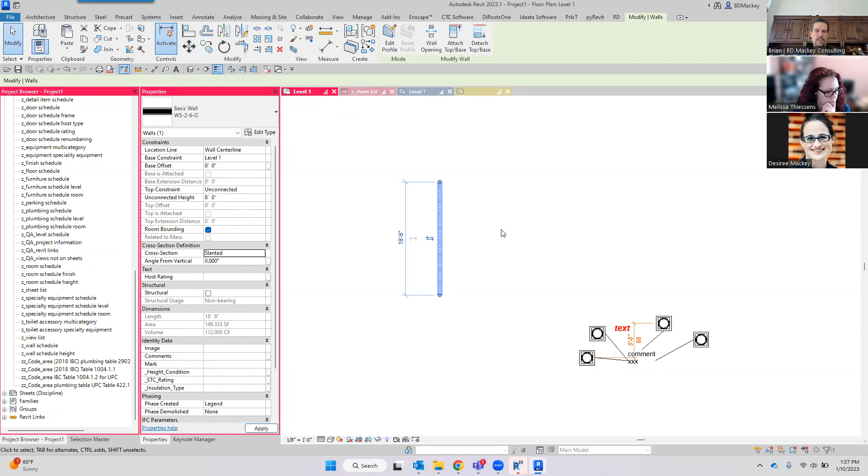You got this. So, how do you fix a door that is placed in a sloped wall? Will the opening follow parallel to the door, or will it angle correctly for the core? Well, first off, the door or the window is going to be vertical. There we go. Let's say this wall is sloped. This is going to be slanted. Sure, we'll put a 4 or 5-degree bevel on there. We will go put a door in here.

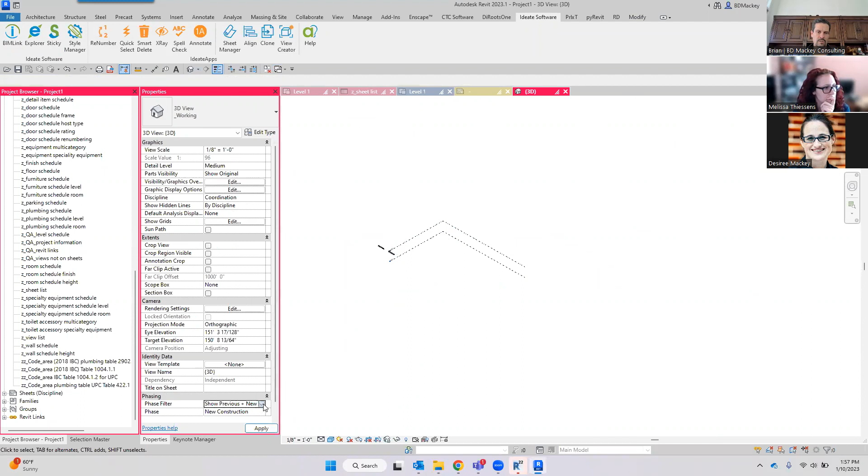So a lot of it depends on the type of door you're putting in as well. But if I go back and look at this in 3D, what do we got? A phase thing here. I'll just get rid of that and say none because I put it in the wrong phase. So if I do have a slanted one over here, this door is going to be set to be plumb, and the opening will cut the opening, but the opening will also be associated to the door.

If you put a window in here, why am I not finding the host wall? Is this window set not to be? Oh man, I jacked with my window family and reloaded it in here for a client the other day. Oh, okay, so my window's not going to work here. Let's load another one. Load family. I'm under annotation still. Windows. Sure.

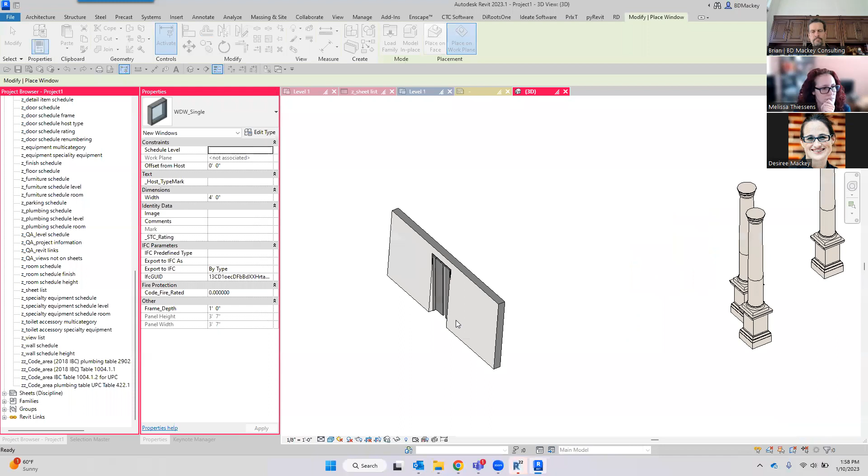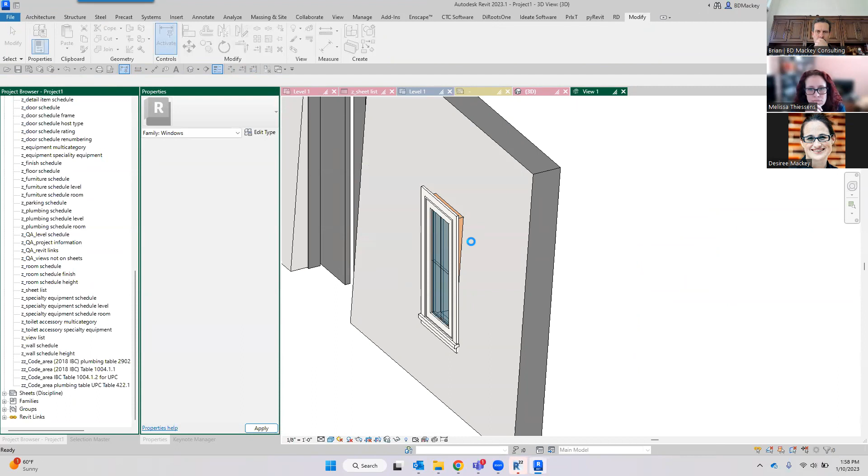So you grab the window, and again, you can kind of see it is plumb when the wall is slanted. I believe if you edit that family and you get rid of the always vertical, I think it follows the host, but I can't remember because it's not like I do a whole bunch of these. Load into project. Yeah, like I said, I think they stay vertical, even if that's unchecked. I haven't found one that will follow the slope.

So if you really needed one to follow that slope, I think what I've had to do is create it as a face-based window. So it'll still cut the opening and then it works just fine. But I haven't found a way if the wall's slanted, oh, no, wait, I lied. There's a checkbox in properties. I know this. There is orientation here. It's slanted. I knew they worked on that. So if you go in here and say slanted, not vertical, because we have slanted sliding doors, and then we cut a section through there with a section box.

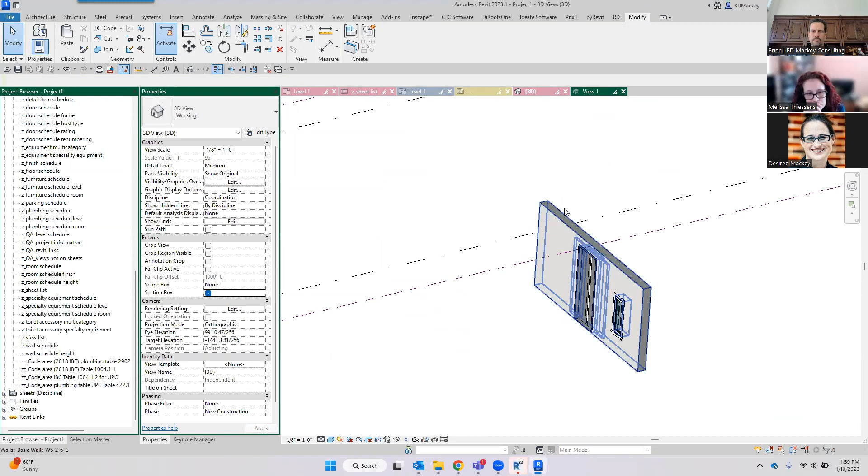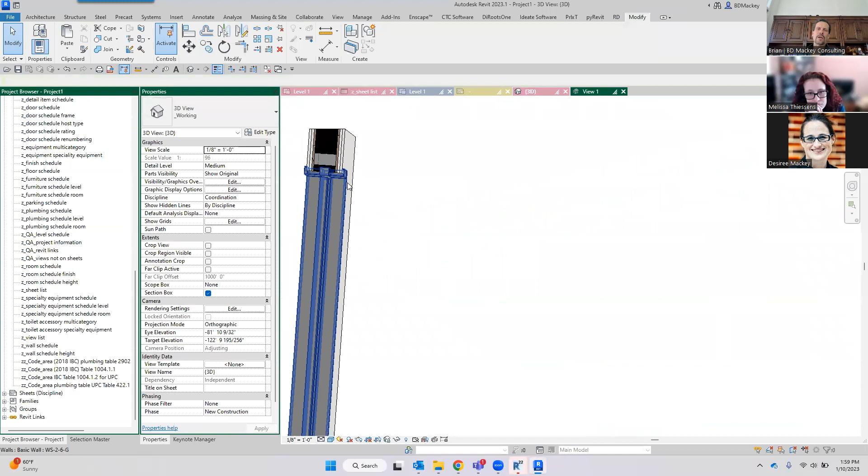And then if you cut it through here, it does go perpendicular to the door. So the opening is always staying to whatever the opening is set to if you're using the opening command. So you can see mine is on a slant. My sliding doors are going to be grinding and scraping, but hey, there you go. The downside I found is since there is an opening in there, if you're truly trying to do this with a door, it will leave that little bit of wedge underneath it.

So you might need to edit your families to have the openings be able to expand if you are going to slant them to go lower, because it does look to that, hey, I'm on the ground plane here, that's where I need to go. So it is sloping up. So if that's the case, you need to edit your families and give yourself an additional opening. Possibly if you wanted the frame to go all the way to the ground, you might need to do something custom there as well. But yes, there's that slanted vertical option. So it stays with the door. So hopefully that answers Anonymous Mouse's question.

Other than that, we're at the top of the hour. Look at that. Perfect timing. That never happens on Revit Radio.